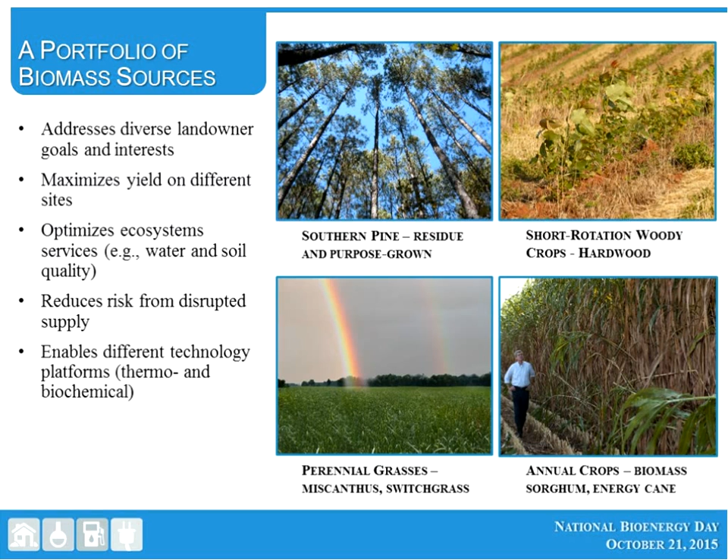The important point maybe as we move along and we think about integrated feedstock supply systems like this, is that we see an increasingly robust industry as well that is able to accommodate different feedstocks and different biomass sources as they become available.

One of the programs that, in my opinion, has made a real impact over the course of the last 6 or 7 years has been one that was developed by the Sun Grant Initiative in partnership with the Department of Energy, Bioenergy Technologies Office. It's called the Regional Feedstock Partnership. This program made a number of important contributions and really I think in many ways elevated the issue and the opportunities of feedstock production and energy crop production in particular to an appropriate level.

The program really engaged a number of researchers across the nation, gathering the experts in different production systems and different crop systems that was absolutely necessary and really led to some very valuable products and outcomes from the work.

Focus areas included corn residue, and there were some very, I think, practical and impactful outputs from the corn residue work, addressing issues of stover removal rates and sustainability that were very important and very valuable in a number of subsequent analyses. Similarly, on the residue front, looking at wheat and cereal straw residues, availability, and the prospect of those materials as well.

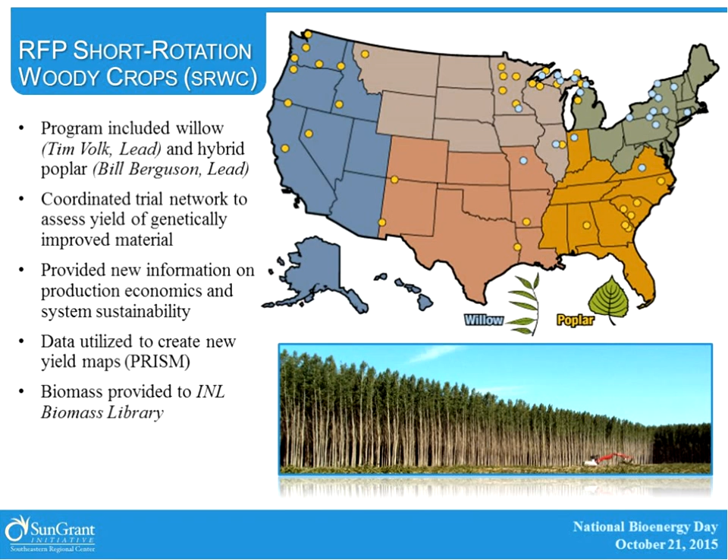Also, because within the program we were generating lots of biomass, lots of that biomass ended up at the Idaho National Lab Biomass Library, providing further information on the chemistry and the quality of the material.

So thinking a little more regionally at this point, the IBSS Partnership, this is a USDA NIFA-sponsored CAP project, one of several that have been installed across the country. The IBSS Partnership being focused in the southeast.

The intent of the IBSS Partnership is really to address barriers to broader deployment of the fuels and chemicals industry in the southeast. A primary barrier has to do simply with feedstock availability, and again, that sustainable supply of feedstock to a technology provider or to a converter in the region.

We have, within the IBSS Partnership, addressed a number of energy crop opportunities as well as the southern pine residue opportunities for biomass supply, but have been particularly interested in advancing the short rotation woody crops.

Now, when we look into the southeast, I should mention that as we talk about short rotation woody crops, and there is something of an emphasis on hybrid poplar and eucalyptus, it is a technology that lends itself to many species in the region. Sycamore, as an example, sweet gum, other types of hardwoods are ideally suited for the short rotation woody crops approach. Our focus has been primarily towards hybrid poplar and eucalyptus, at least within the IBSS Partnership.

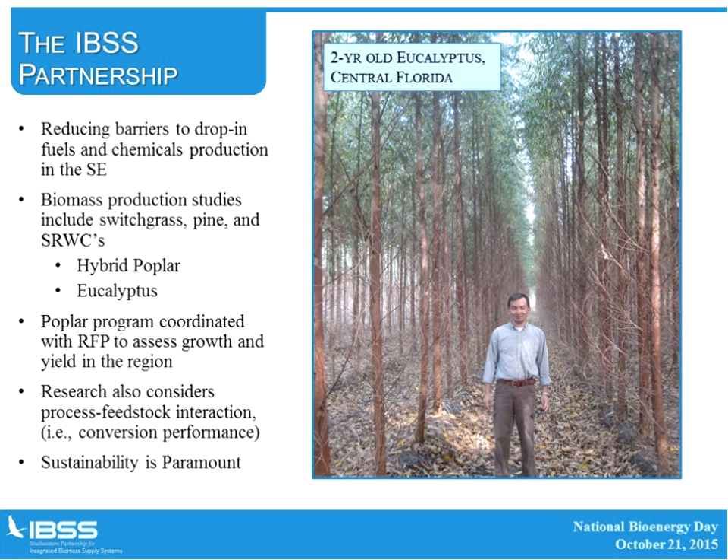Within the IBSS Partnership, a critical consideration as well has been sustainability, and it's something that we'll continue to keep at the front of our mind as we think about feedstock development for the industry. A little more information on the IBSS hybrid poplar program in the region: we feel fortunate in that we have a number of different trials scattered across the southeast.

When you think about yielding a new commercial variety, there are a number of steps involved. It begins obviously within the greenhouse, but is followed up quickly by clonal trials, where maybe a couple of hundred different clones are evaluated in the field for their performance. Selections are made. Yield trials become the next step, which are typically a little bit larger in scale and give us a better picture of growth and yield for any particular clone, and then on to demonstration.

And we're excited to have essentially every leg of this process represented within IBSS, continuing to advance the potential for woody crops and hybrid poplar in particular in the region. We've really emphasized yield trials.

You know, one of the interesting things about tree genetics, or poplar genetics in particular, is that in many ways genetics are local, so it's very important that we identify which clones or which varieties are best performing in certain regions, and that's a big piece of what IBSS has been involved in with trials in North Carolina, Tennessee, Alabama as well, and most recently in Mississippi.

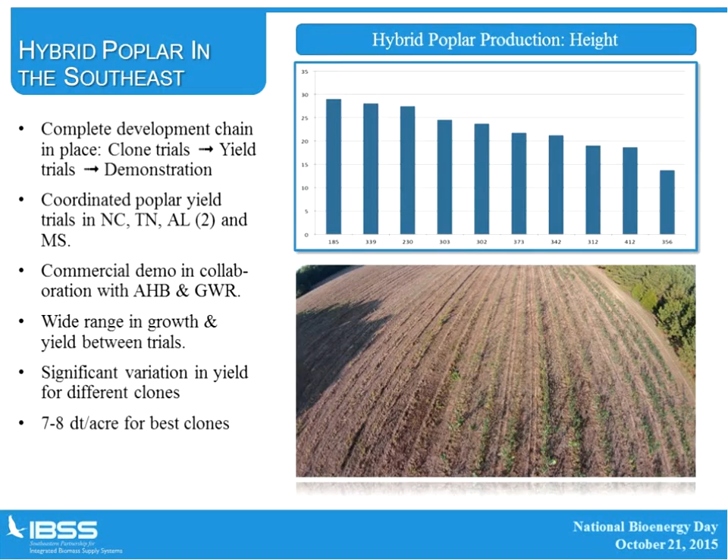But as we look at things as a whole, one of the things that we've seen and continue to confirm is that there really is a wide range in growth and yield characteristics between the different trials. So this is providing very valuable and needed information in continuing to down select for optimal clones, or the best clones for this particular region and for different sites. That's highlighted in the bar chart on the top right; this gives you some indication of the range of tree heights that we've observed for the different trials.

So yield is absolutely important. It's central to sustainability questions and being able to really optimize and maximize the production of biomass on the land across the region. So yield has been and continues to be front and center as we think about feedstock development and biomass supply options. But there's another piece to the puzzle, and that has to do with quality.

So in the case of quality, it really is contingent on the output or on the particular technology that we're focused on. But just to highlight, in this case, for biochemical conversion in the short rotation hybrid poplar, we're plotting lignin content against cellulose content. For biochemicals, cellulose content is a particular quality metric, in that this has the sugars that the industry is particularly interested in.

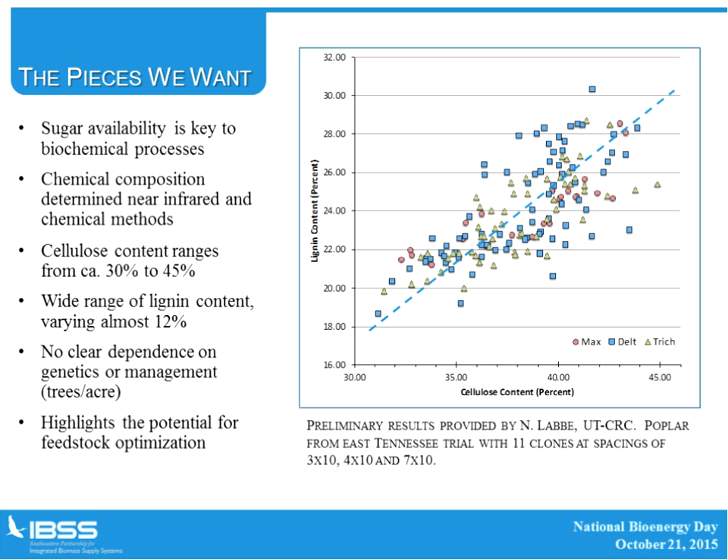We've been surprised, frankly, to observe a very wide range of both lignin composition and cellulose content. So understanding the chemical composition and the impacts that it has offers another very real opportunity to maximize efficiency and improve processes. So as we think about biomass conversion and the question of quality, it certainly has to do with the pieces that we're particularly interested in, like sugars.

But the other challenge has to do with the parts of the biomass that we aren't particularly interested in, that aren't contributing to the products of a given process. Extractives and inorganics are a couple of obvious examples for us. And we've done some work, again looking at hybrid poplar and the variation in quality of this particular feedstock. Ash has been a real concern in thermochemical conversion, which is something that we're paying more attention to as time goes on.

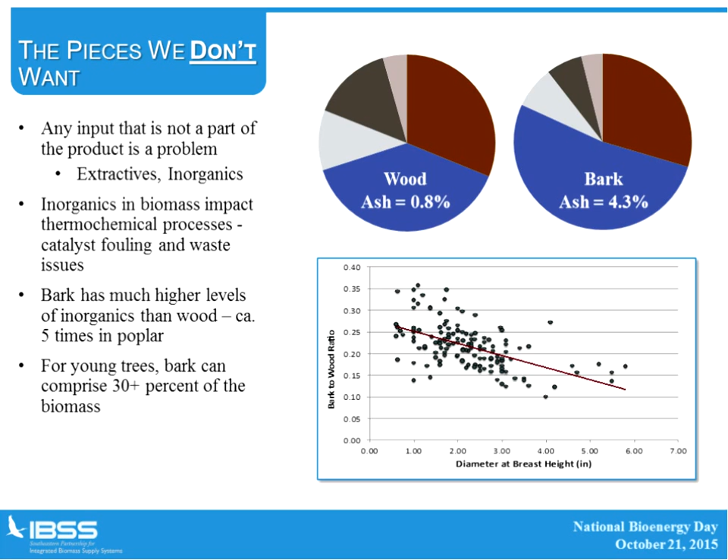And this is just to highlight that one of the question marks as we think about actual biomass production for woody systems is that bark has a much higher ash content than wood, and consequently it's a consideration that has to be met, especially in production of short rotation woody crops, where the bark content can actually be 10 to 15%, upwards to 30% of the biomass delivered. So it's a consideration that needs to be taken into account.

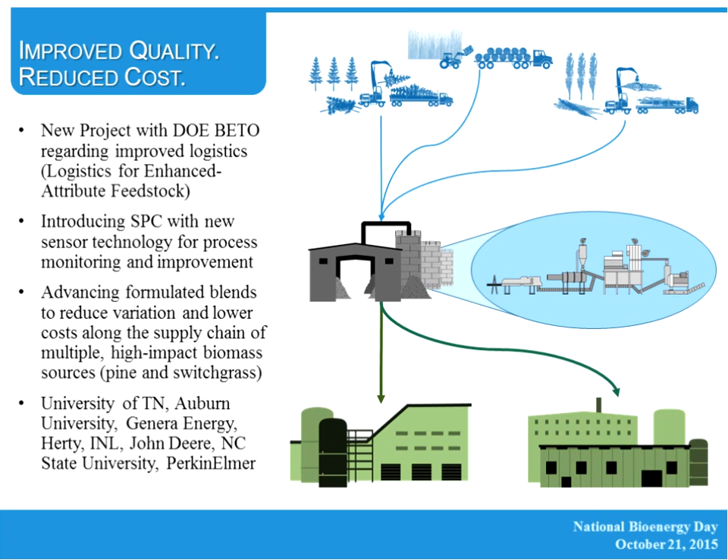We've recently started a new project with the Department of Energy Bioenergy Technologies Office that is introducing considerations of feedstock quality. In particular, it's looking at integration of different feedstock sources to maintain a consistent, reliable, and predictable supply of feedstock in the long run. We're excited about where this project is headed.

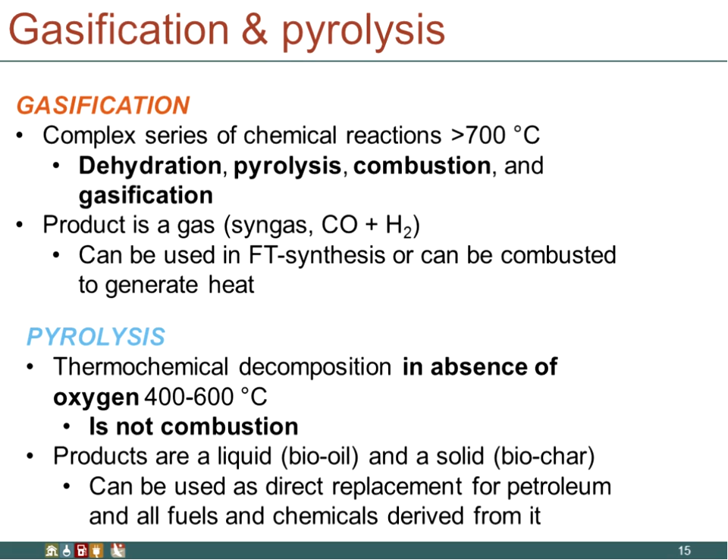It's a different process. So the products of pyrolysis include a liquid, which we call bio-oil, a solid, which we call biochar, and other non-condensable gases. And we'll go over all of those things in a moment. And it turns out that the liquid product is especially important to research and development because it can ostensibly be used as a direct replacement for petroleum and all of the fuels and chemicals and other products that we derive from it. And I say ostensibly, we'll go over some properties of bio-oil that make it a little challenging to directly incorporate into petroleum infrastructure.

So before we jump into pyrolysis, I'll mention that we're not going to really talk about gasification today in the interest of time. We're going to go over more about pyrolysis and the generation of biochar and bio-oil. And that's the research that I'm currently involved with at the CRC, on pyrolysis.

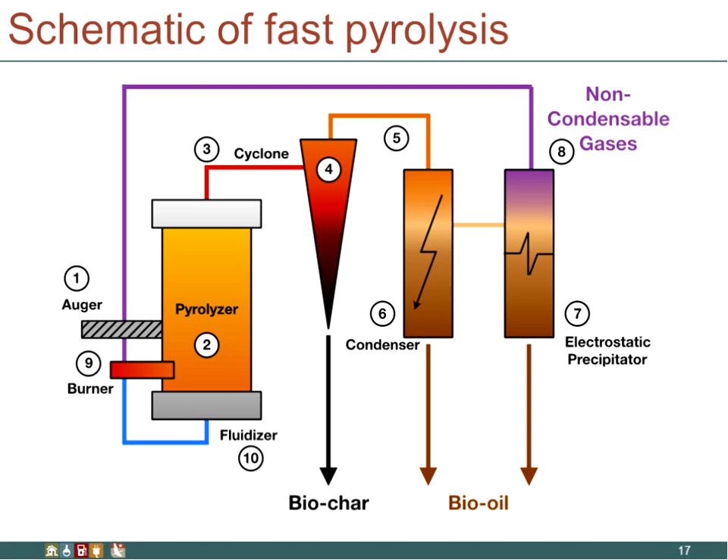So I'm going to go over these individual steps in a little more detail. And I apologize here, it looks like the figures got kind of garbled. But if we talk about the front end, we're talking about an auger, and you can see that in the background. An auger is sort of a fancy name for a screw, right? The screw actually feeds the biomass particles directly into the pyrolyzer.

So again, because we're pyrolyzing in the absence of oxygen, we can't just open the top of the reactor and shovel biomass in. It has to be fed in the presence of an inert gas, typically something like nitrogen, so that we eliminate all of the oxygen from the reaction, because if there's oxygen around, then we're actually just combusting the biomass. We're just burning it as opposed to pyrolyzing it. And it's fed into this reactor.

There's different types of pyrolysis reactors, but the one that I'm attempting to show here anyway is called a fluidized bed reactor, and it's a pretty common reactor. And in a fluidized bed, there's actually a fluidizing material. It's typically something like sand, and that's what's heated to the high temperature of 400 or 600 degrees. And when the biomass touches that sand is when it pyrolyzes, and the gases pass out of the top of the reactor and are fed through the rest of the system, along with any solid products.

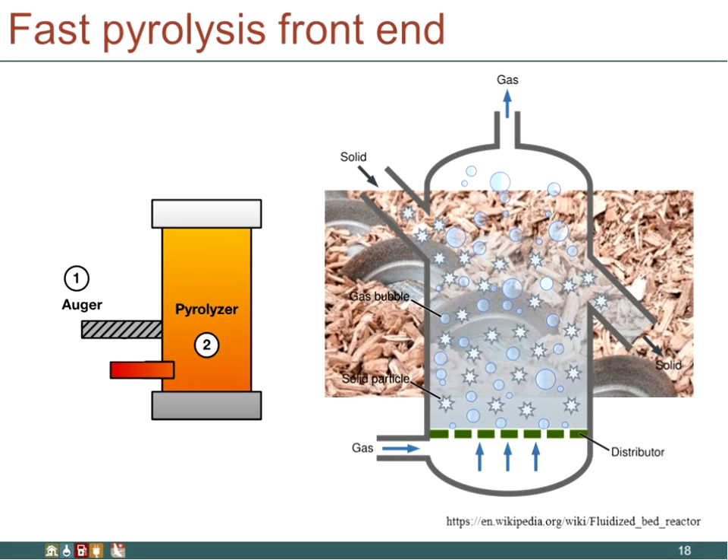And you can see that there's some gas there at the bottom that's used to fluidize the bed. So what we have looks very much like a pot of boiling water, except what we have is really hot sand that's sort of bubbling. And because we use the solid sand as opposed to a liquid, we can heat it up to a much higher temperature to do these reactions.

So as the gases, and like I said, any of those entrained solids, the solids that escape as well, pass into the cyclone, we collect biochar, and that's the first product that we get from fast pyrolysis, that solid product, which we'll talk more about in a moment. But I wanted to talk about the cyclone too. If you have ever worked in or have a wood shop, you probably are familiar with a cyclone.

It's how you get the sawdust out of the air, and it works very much the same way in the pyrolysis reactor, in that any of the gases that come out of the reactor are passed into the cyclone, and the cyclone has got this cyclonic shape because it forces the gases into a vortex, and the solid particles have sufficient inertia where they can't be forced into that vortex, so they hit the sides of the cyclone and fall out of the bottom as biochar, and that's what we collect as biochar.

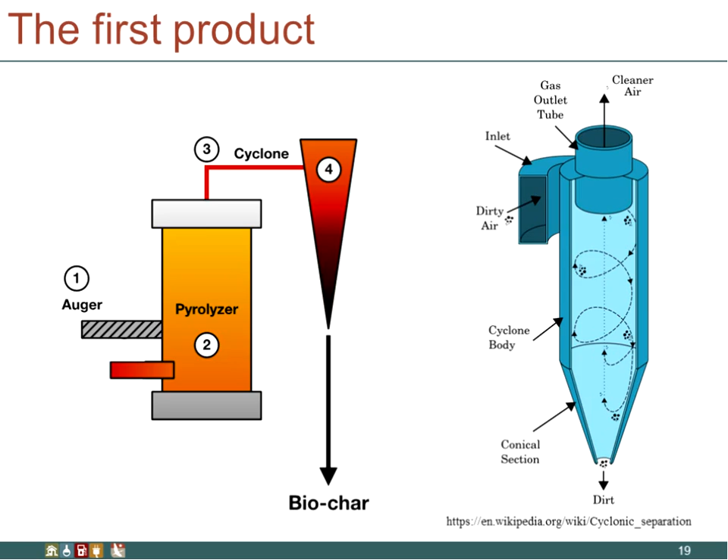And the cleaned gases can then be passed through the top into the next step for pyrolysis for further reaction. So let's talk a little bit about biochar. Like I said, this is the solid product of fast pyrolysis, and it's comprised mostly of carbon and also contains the inorganic ash that was in the biomass to begin with.

The ash components, things like magnesium and potassium and sodium, those things that you put on your grass or on your plants as fertilizer, don't go anywhere; they don't change during fast pyrolysis. They're actually still in either the ash or the oil that we get at the end. And so here is one way to collect those via this biochar. So the char is just carbon. It's actually very porous and has found some use as a soil amendment.

So you can actually put this in the ground, much like you would fertilizer, to amend the soil, make it better for plants that you're trying to grow. And it's great as a soil amendment because it readily absorbs water because it's so porous. And it also contains those inorganic nutrients that you would otherwise be putting on in the form of fertilizer. It's already in the biochar. And because it's porous, it can actually house some beneficial soil microorganisms that help maintain the quality of the soil.

We also call biochar recalcitrant carbon. Whereas when you combust biomass or anything that contains carbon you form carbon dioxide, which is released into the atmosphere, biochar is carbon that's in a solid form that we actually bury in the ground, so it's not released into the atmosphere and doesn't contribute to anthropogenic climate change.

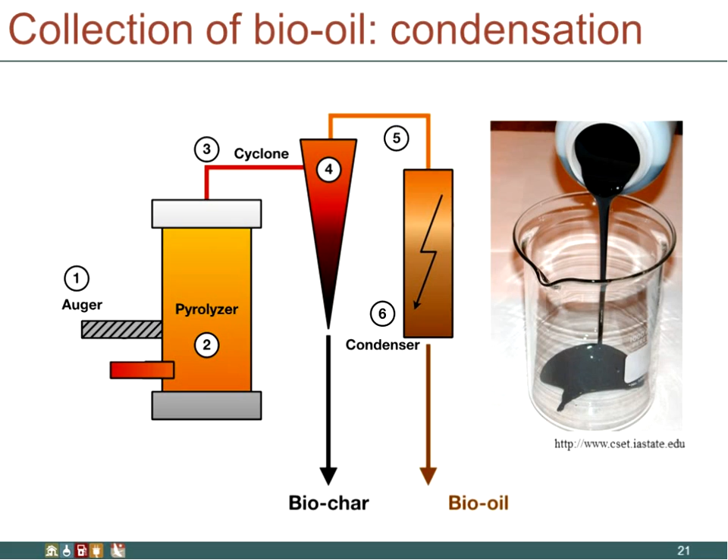And I have a picture here of some bio-oil, and you'll notice it looks a lot like crude oil. You know, if you've seen the Beverly Hillbillies, they talk about black gold or Texas tea, right? So it definitely does look like crude oil, and that's probably where the similarities end. But we'll talk a little bit more about bio-oil in a moment.

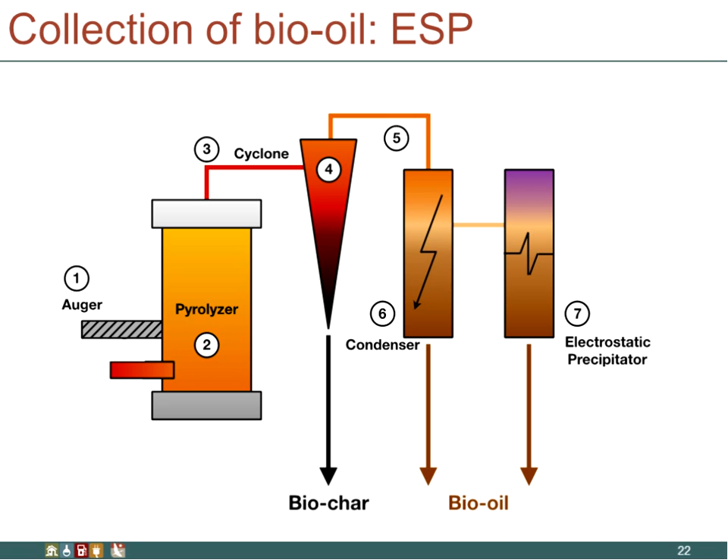So the last step, which is sort of optional, in fact some reactors don't contain an electrostatic precipitator, but it's useful to remove even more of the gaseous materials from the stream to collect additional bio-oil products. And we'll talk a little bit about electrostatic precipitation. In this process, you just take your gas molecules and you pass them over an electrode.

And as they pass over this electrode where there's this large potential that's produced, they get ionized. And when those ionized particles pass through the opposite electrode, those red plates, they become attracted to it. And when they hit the plate, there's a charge recombination that occurs, and those neutral particles then fall out of the gas stream and are collected, and that's how we collect additional bio-oil.

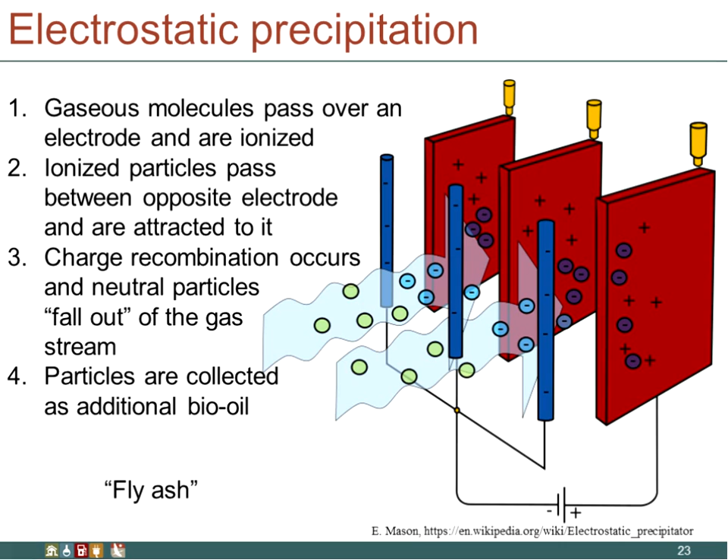And so I had down there at the bottom of the slide, in quotes, fly ash. You may have heard of fly ash. In fact, people from the area here in East Tennessee might remember the fly ash spill at the coal plant in Kingston, Tennessee in 2008. Fly ash is actually removed when you combust coal using electrostatic precipitation. It's a pretty common process in these industrial processes to remove particles from gases so that you can release clean gas into the environment.

So the last bit is the non-condensable gases. So now the only thing that's left in that gas stream from when we started with whole biomass way back at number 2 are the things that we can never condense, that do not condense at atmospheric pressure. So those are permanent gases like hydrogen or methane, carbon dioxide, carbon monoxide. Those gases, we can actually reuse those. We can send them right back to our burner at number 9 in the bottom left.

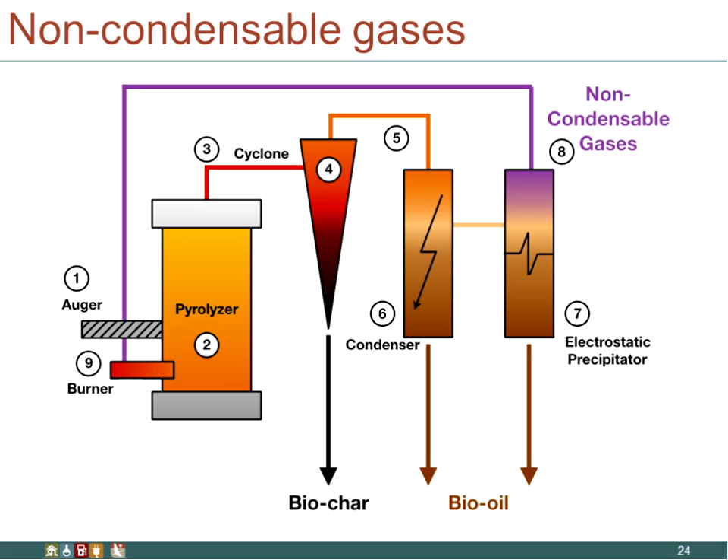And anything that will combust, we burn to generate heat for our pyrolyzer, for our reaction, so that we can get up to that 400 to 600 degrees C. And there's one last little bit that didn't make it on there, but the last part then are the gases that do not combust. Those are the things that are left over, like carbon dioxide or maybe nitrogen, that will pass directly into the pyrolyzer to actually fluidize that material. So that gas that comes into the bottom and makes the fluidizing material bubble, we can use that too. So we can use every part of the biomass that we put in directly in the process.

So let's talk about some physical properties of bio-oil. I have a table here where I'm going to compare the properties of pyrolysis bio-oil and heavy fuel oil. So heavy fuel oil is what's left over when you take crude oil and distill away the gasoline, the diesel fuel, and the jet fuel. You're left with heavy fuel oil. And so there are properties here on this table like moisture content. It's about 1/10 of 1% water.

It's mostly hydrocarbons. Specific gravity is a property where you compare the density of the material you're looking at to the density of a known material. So in this case, it's water. Specific gravity of 0.94 means it's less dense than water. And then the elemental composition, it's about 85% carbon, which is useful for us because we can turn that into products and fuels. About 11% hydrogen and very little oxygen, nitrogen, or ash content.

HHV is high heating value, so that's the amount of energy that you get out when you burn, in this case, a kilogram of material; you get 40 megajoules of energy. It's going to be useful for comparative purposes in a moment. Viscosity, 180 centipoise, means it's pretty viscous. It's really thick. It has a very high resistance to flow.

It's about 1 weight% solids, and if you take this material and you put it in a fractional distillation column, like you would in a petrochemical refinery, you can use about 99% of it. In fact, we'll use all of it. There's 1% that's left over as residue in the bottom that we use for things like asphalt. But 99% of it distills over, and we can use it for other products.

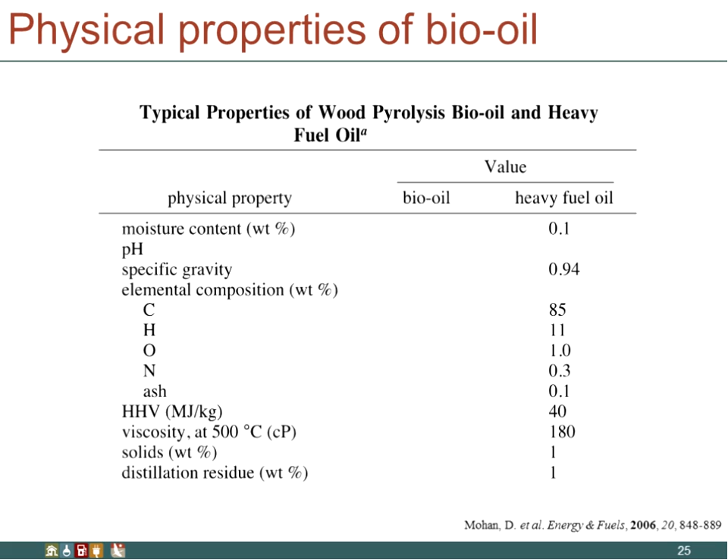And it turns out that the distillation residue at the very bottom is about 50 weight %, which means that if we try to distill heavy fuel oil, 99% of it more or less distills over. About 50% of bio-oil will distill. The rest of it is left in the distillation pot. It's recalcitrant material that we really have difficulty distilling and using in other processes.

So how do we overcome the properties of bio-oil that we don't like? Well, the research in my lab and in other labs at the CRC and in the IBSS Partnership deals with catalysis and using catalysts to change the properties of the bio-oil or the pyrolysis oil vapors into something that's more favorable or something that we want. So in general, catalysts are molecular species that alter reaction rates. They speed up reactions.

You can have a homogeneous or a heterogeneous catalyst. Homogeneous catalysts occur in the same phase as the reactants that you're talking about, and heterogeneous catalysts occur in a different phase. So what I mean is, if you think about pyrolysis, you have this vaporous, gaseous material. And if you have a solid catalyst, then the solid is a different physical phase than the gas. So we have a heterogeneous catalyst system. And that's primarily what we use when we do catalytic fast pyrolysis, heterogeneous catalyst systems.

I should tell you that over 90% of all industrially produced chemicals in the world today involve at least one catalytic step. So just about everything that you purchase that is made from chemicals has probably had a catalyst involved somewhere in its production.

And I should also tell you that in 2013, demand for just catalysts was $16.3 billion, which equates to about 1/10 of 1% of the gross domestic product of the United States. That doesn't even take into account the cost of the products that you made. Just to buy the catalyst to do the process required $16.3 billion in 2013.

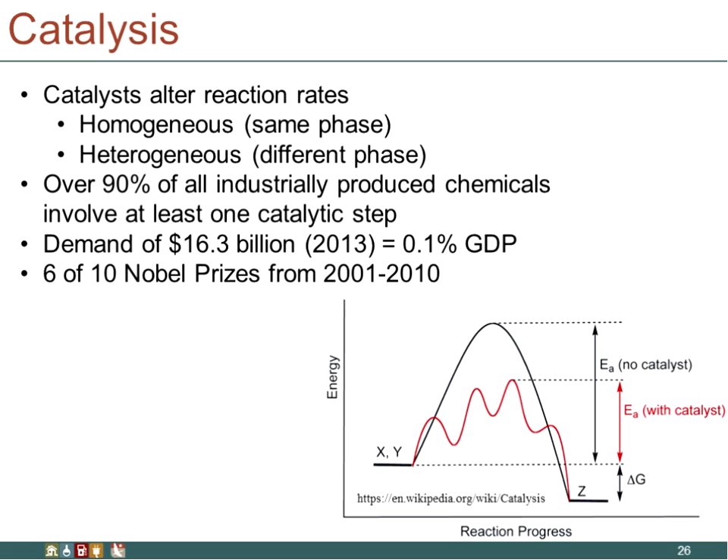In the bottom right corner there, it's just a schematic representation of how a catalyst works. If we can lower that energy barrier, then we can speed up the reaction rate. That reaction progress happens much more quickly.

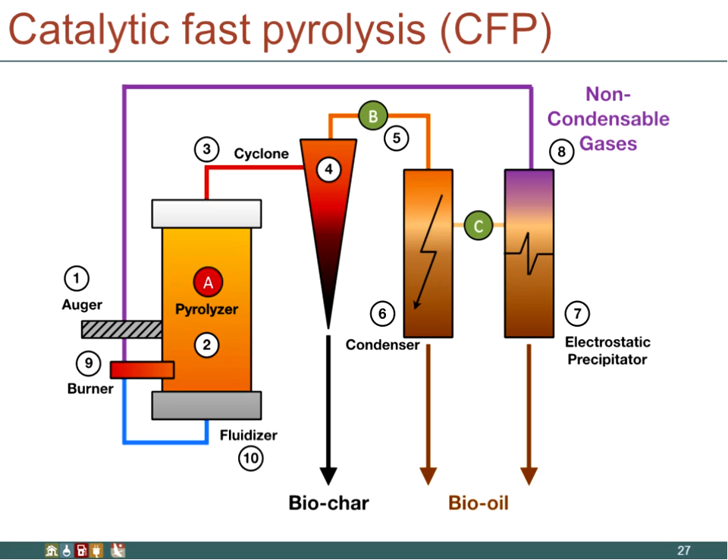So whereas we've been talking about fast pyrolysis, you can actually do what's called catalytic fast pyrolysis, where you add a catalyst species to alter the composition of the vapors and/or the oil that you get at the very end. And you can add catalyst species, if you look at the cartoon again, essentially anywhere in the process, but a lot of research is conducted that deals with catalysts either in position A or B or C or somewhere around B or C. And we'll talk about what those are and what those mean.

So if you put your catalyst directly in the pyrolysis reactor, you are conducting what's called in situ catalytic fast pyrolysis. And in situ just means on site. It's exactly where the pyrolysis is occurring. So the catalyst species itself is in direct contact with the biomass. And so you essentially eliminate many issues with mass and heat transfer because your catalyst is actually touching the material that it's trying to convert into something more useful.

In addition, you can affect the regeneration of your catalyst if you need to regenerate it directly on stream. If you remember the diagram of the fluidized bed reactor, you can actually take the solid material out of the reactor and replace it with fresh catalyst material if that's what you want to do.

Unfortunately, the catalyst being in direct contact with the biomass is also bad for the catalyst. It's good for the conversion, but it's bad for the catalyst, because coking and fouling can occur. So coking is when the carbon in the biomass is deposited directly on the surface of the catalyst, and it actually physically blocks additional reactions from taking place on the catalyst surface. And fouling occurs when those inorganic materials that are present in the biomass actually chemically react. They could also physically react with the catalyst itself, and they can alter the chemical composition of the catalyst directly.

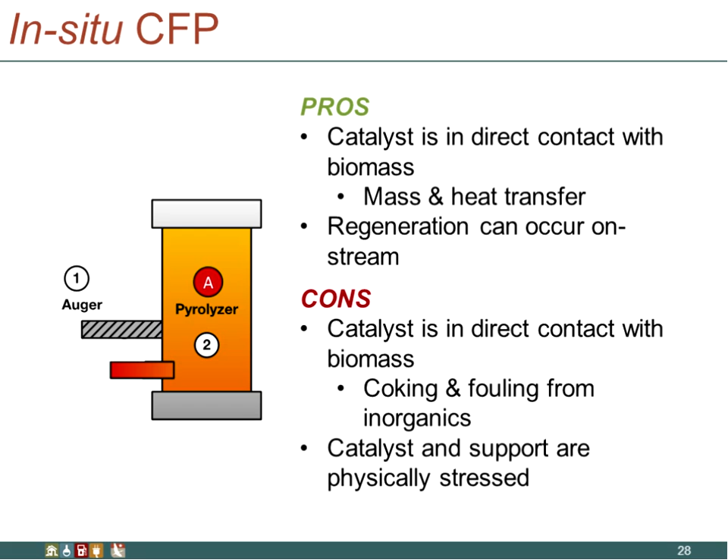In addition, if you put your catalyst directly in the fluidized bed, you can physically stress your catalyst and the support because they're sort of smashing around in there with the fluidizing material and also with the biomass at really high temperature. You start to pulverize the catalyst and change its morphology, at least on the macroscopic level.

So it's less likely that things like coking and fouling could be an issue, although we find, depending on the catalyst composition, those still can be problematic. But actually physically separating it from the biomass can be very helpful to mitigate those effects. It's also less susceptible to fouling and physical destruction.

You know, if we put the catalyst after, say, the cyclone, then hopefully we've removed many of those entrained inorganic species. They're stuck on the biochar, and they're not actually making it to the catalyst species, and they're not fouling the catalyst. And the catalyst is in what's called a fixed bed, so it's sitting at elevated temperature, but it's not being smashed around by biomass or other fluidizing material. So it's less likely that it will become physically stressed during the reaction.

However, you could think about the reaction taking place at a lower temperature. As we get further away from the pyrolytic reactor, the temperature gets lower and lower until we get to the condenser. And this means that the kinetics could be slower, the reaction could take more time. You know, you think about when you cook spaghetti, the reason you boil the water is because the spaghetti cooks faster at the higher temperature. Same thing here, the reaction will take place faster at the higher temperature inside the pyrolysis reactor. So we have to artificially raise the temperature further downstream to get those faster kinetics.

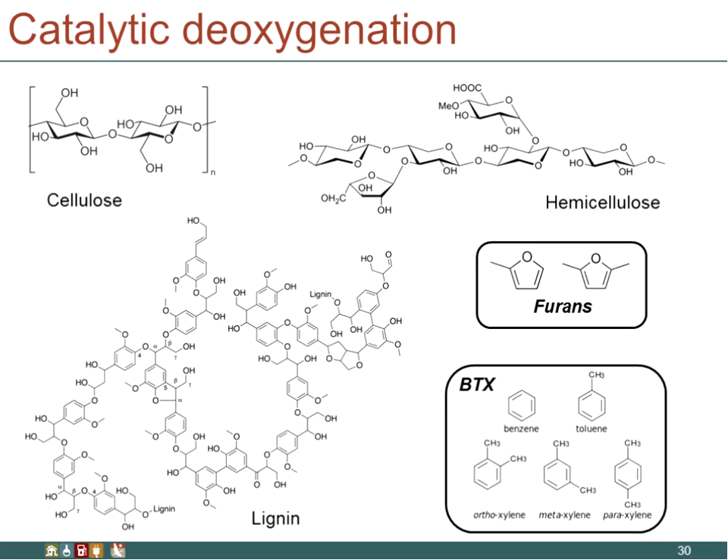So the question becomes, can we catalytically remove oxygen atoms selectively to produce things like furans in the box, which could be produced from cellulose and hemicellulose, or in particular from lignin we might be able to selectively produce BTX, which is a mixture of benzene, toluene, and xylene, that I'll just talk very briefly about. I'll show you the BTX chain here.

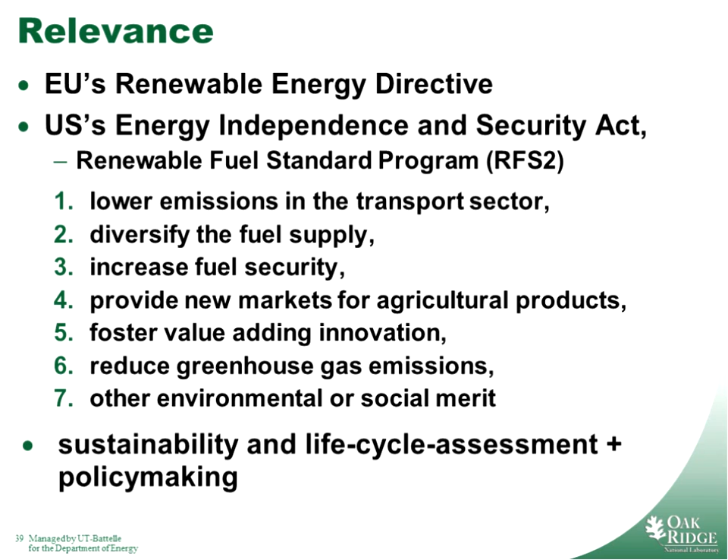And the RSB, Roundtable on Sustainable Biomaterials, has said that these are macro-level impacts and are likely to be beyond the control of the individual farmer or biofuels producer. So herein lies the problem with indirect effects. They're unable to be measured, and they're hard to attribute to a process or a producer. And yet there is general agreement, or there's a movement within the general population, policymakers, many researchers, environmentalists as well, that indirect effects are important and that they need to be addressed, even though they can't be measured and cannot be attributed to a process.

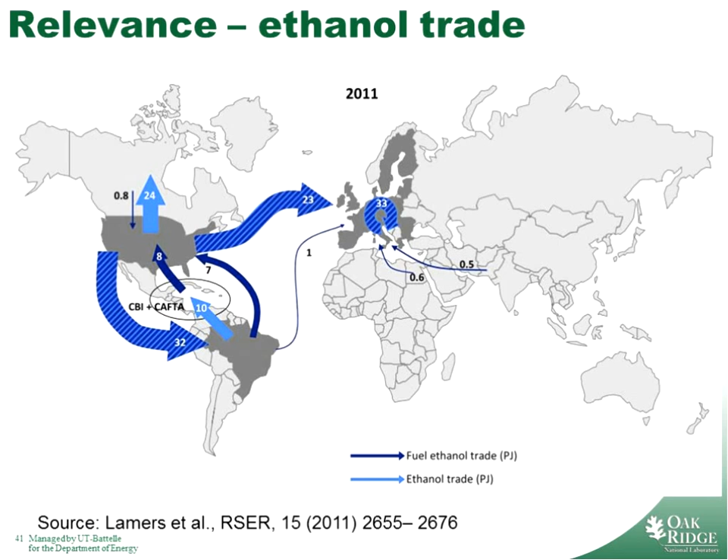So more on relevance, the EU's Renewable Energy Directive and the US's Energy Independence and Security Act, under which the RFS2 was implemented. These are two policy decisions that actually take into account indirect effects.

Generally, these policies were implemented to lower emissions in the transport sector, diversify the fuel supply, increase fuel security, provide new markets for agricultural products, foster value-adding innovation, and also reduce greenhouse gas emissions. And in general, they were supposed to have other environmental or social merit. So right about the time that these policies were being passed, the concepts of sustainability and life cycle assessment had entered the vernacular of policymaking as well.

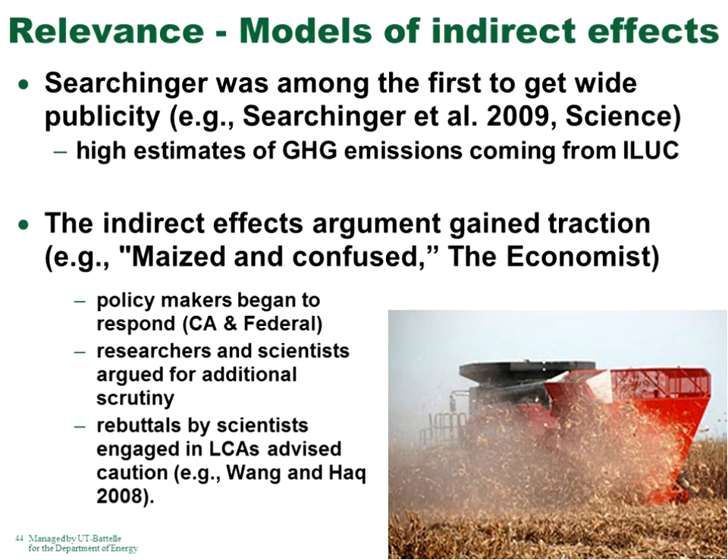So getting back to the topic at hand, you see that international trade of bioenergy is a big industry and is growing in importance as we grow our bioeconomy. But what about indirect effects? Indirect effects can actually be a major barrier to acceptance of bioenergy nationally and globally. So the brief background on indirect effects is that Searchinger was among the first to get wide publicity. He had an article published in Science in 2009, and he had very, very high estimates of greenhouse gas emissions coming from indirect land use change.

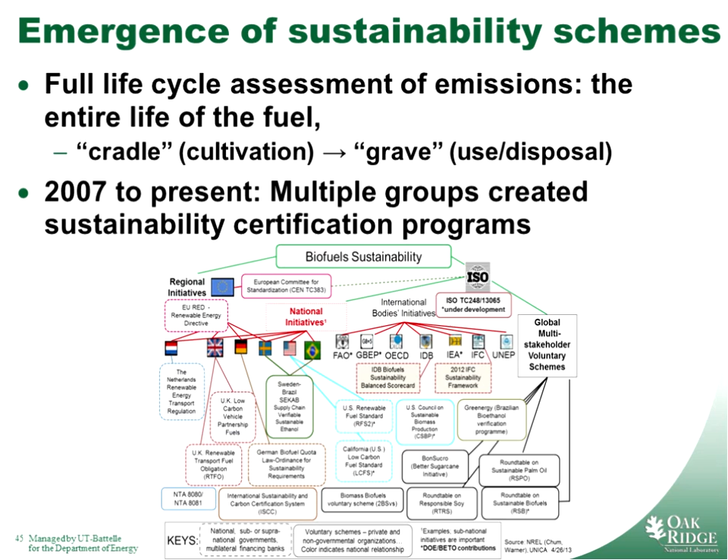This received a lot of attention, and policymakers began to respond. There were even some high-level articles, such as Maized and Confused, in The Economist that got a lot of publicity. And this was although researchers and scientists argued for additional scrutiny, and there were many rebuttals by scientists engaged in life cycle analyses that advised caution. There's one article by Wang and Haq in my references if anyone's interested. So even though scientists were arguing for people to put the brakes on jumping to too many conclusions, it was included in the policy making federally and in California.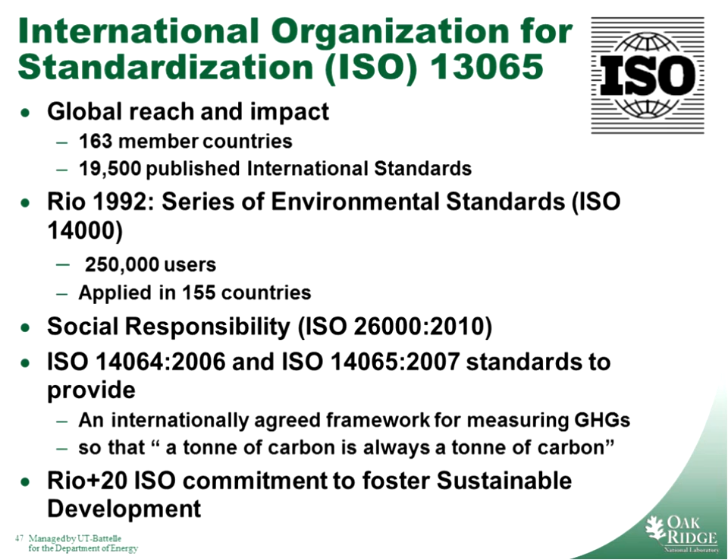And embedded in these policies was the obligation that required fuels should be evaluated for their sustainability and assessed for their emissions on a full life cycle basis, or throughout the entire life of the product from what they call cradle to grave, which grave is often the use or the disposal of the fuel source. So in practice, this meant that the LCAs of the fuels should include indirect effects, and that their sustainability analyses would be performed by either the responsible government agency or via sustainability certification schemes. So from 2007 onward, there was a flurry of activity by multiple groups to create certification programs that could address these life cycle analyses and indirect effects that policy was requiring.

So that brings us to my approach, or our approach, under ISO 13065 in looking at indirect effects. So a little background on ISO. I wasn't familiar with it before I joined the project committee, so figured I'd give the background for most people who aren't that familiar with it either. It does have a global reach. There are 163 member countries with almost 20,000 published international standards. Rio 1992, there was a series of environmental standards that came out of that, the 14,000 series, and they have actually received a lot of really good feedback on those. They're applied in 155 countries, and there are over 250,000 users.

So coming out of that, ISO tackled social responsibility, which was a little more controversial. Their 26,000 series was published in 2010 and has been in use, although not as widespread as their 14,000 series. So I'll skip the rest of this in interest of time. And I'll jump to who we are. So ISO created 13065. It's led by Brazil and Germany. And it is a standard that's looking at sustainability criteria of bioenergy.

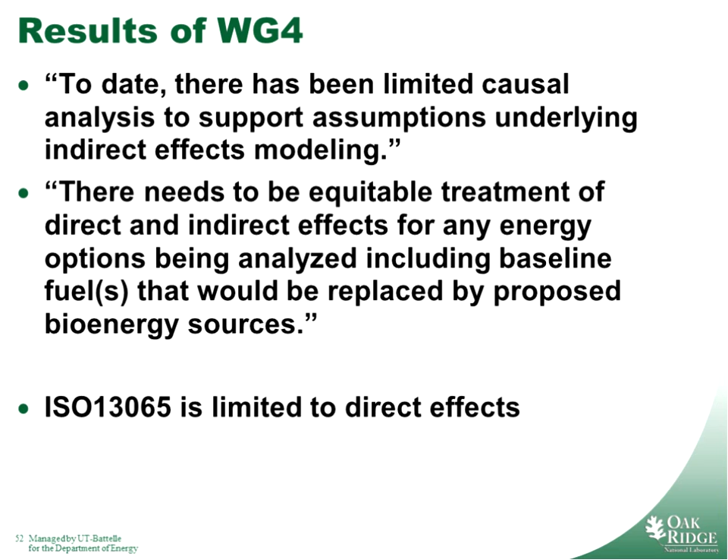So our results were that the state of the science in terms of evidence-based research is inconclusive or contradictory regarding indirect effects. We also highlighted that an economic operator should not be held responsible for indirect effects and variables that are outside the operator's control. This was a key statement that we presented to the project committee who was drafting the standard ISO 13065. That was just a recommendation, and it was taken into account whenever they were actually drafting indicators and methodology for dealing with effects of bioenergy.

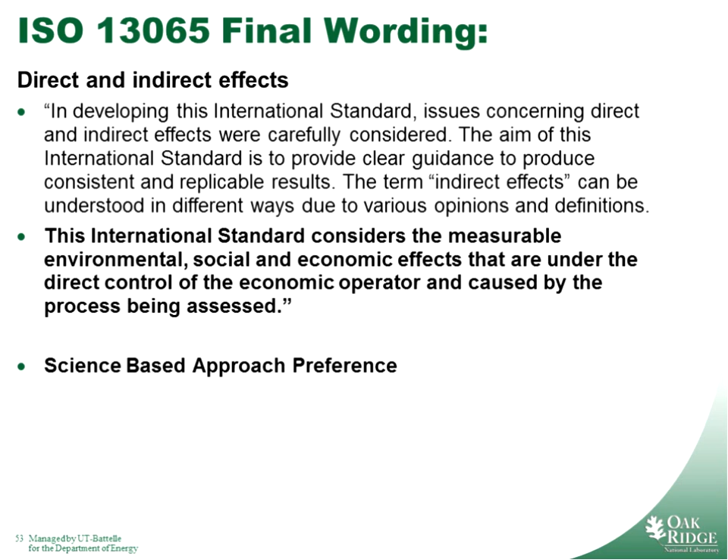We also highlighted that recent modeling of indirect effects has highlighted potential impacts as well as the high variability in results, though much of the modeling thus far has relied on assumptions that may not be supported by empirical evidence. So to date, there has been limited causal analysis to support assumptions underlying indirect effects modeling. That was another conclusion of the working group, and that there needs to be equitable treatment of direct and indirect effects for any energy options being analyzed, including baseline fuels that would be replaced by bioenergy sources. So that would be putting bioenergy on an even keel with other energy sources because the world uses energy. If it's not bioenergy, it's going to be something. And ultimately, the project committee decided not to include indirect effects in the standard.

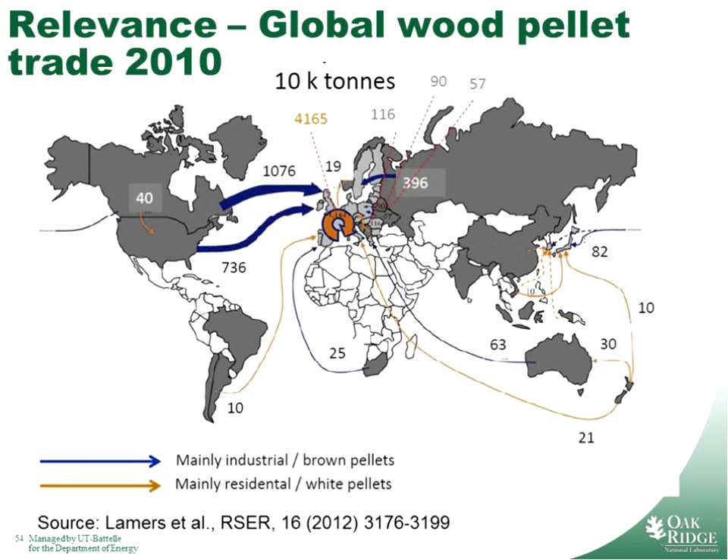The final wording, again, this standard is available on the ISO main website, and I have a link to that website in my references at the end. It's available for purchase. Unfortunately, I can't share it, but I am able to share this conclusion on direct and indirect effects, which is that in developing this international standard, we considered these issues very carefully, and in the end, they decided that this international standard considers the measurable environmental, social, and economic effects that are under the direct control of the economic operator and caused by the process being assessed.

We also had a big win within the standard by focusing the entire standard on a science-based approach whenever possible. And the standard does define what that is, and it gives a preference to science that's based on empirical evidence.

So bringing it back to why this matters, the global trade of bioenergy has been increasing over the last several years and is projected to continue to increase. This is a 2010 map of global wood pellet trade, but it's even increased from that in recent years. And there is actually a movement within the EU. You can see a lot of the pellets coming out of the US and Canada are going into the EU, but there is a question of what the indirect effects of the cultivation of these feedstocks are, and it really could have major implications for the exports of wood pellets and bioenergy in general.